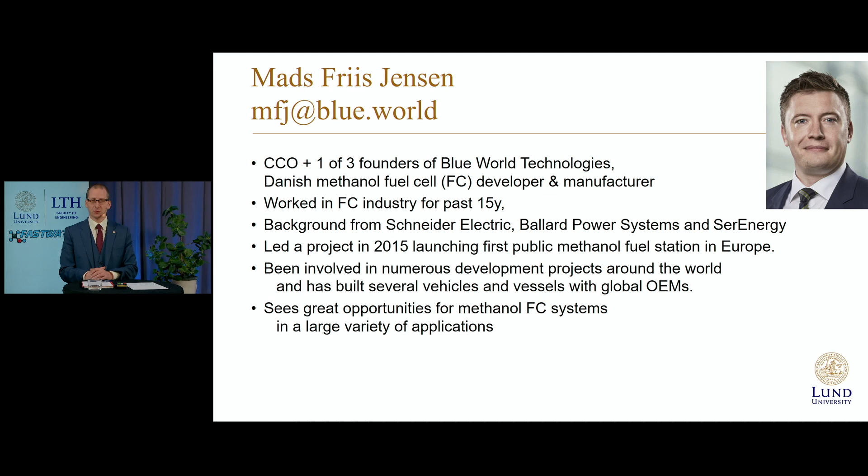Thank you. So thank you for the invitation to give a quick talk here about methanol fuel cells, the status, where we are, and how we see the development in the future.

Methanol fuel cells can be done in many different ways. There are some different technologies, fuel cell types. The one I will be focusing on is the PEM type fuel cell and the high temperature PEM type fuel cell with an external methanol reformer. So this means methanol is reformed into hydrogen, and this hydrogen is then converted into electricity in the fuel cell.

When using a methanol reformer, there is a limitation as to how fast you can dynamically change the load points of the fuel cell. So mostly when dealing with reformed systems for fuel cells, you would also have a battery system to take care of the peaks in any different application. So that's an intricate part of having methanol fuel cells, is some kind of hybridization mode.

As a company, Blue World are focusing on many different areas, primarily automotive and mobility solutions, so land-based transport. Also some other areas where you can replace a typical combustion engine with a methanol fuel cell, and then the heavy-duty segment, where the maritime area is regarded as that. Main point is that we can reduce CO2, remove harmful emissions, and save some cost due to a higher electrical conversion efficiency in most engines.

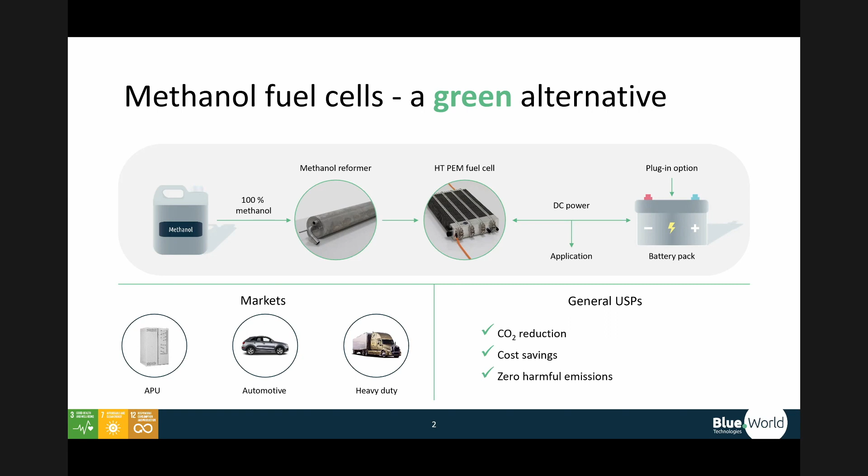So the high temperature PEM technology is a little bit different than other types of fuel cells, the traditional low temperature PEM. Now, the big advantage of high temperature PEM is its elevated operation temperature. It's operating at around 160 degrees. This means that the waste heat from the fuel cell has some potency, and it can be used to evaporate the incoming fuel. The incoming fuel will be a mixture of water and methanol, and this can then be evaporated by the waste heat, meaning you save some net energy in that total conversion in a system.

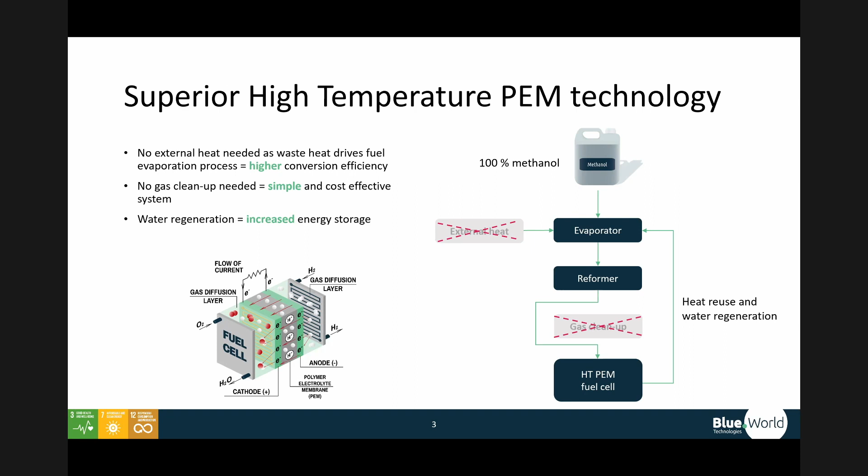Once the gas has been reformed in a generic or normal situation, if you want to use other fuel cells, you need to clean the gas. The carbon monoxide in the reformed gas is not acceptable to especially the low temperature PEM type fuel cell. With high temperature PEM, it is acceptable. So this means the simplicity in the system design is very high because there is no need for gas cleanup. So these things all put together means that the overall system is a very simple one, and you have a high net electrical efficiency because you can reuse waste heat streams and waste gas streams inside the fuel cell system.

The mixture of water and methanol, giving the right steam to carbon ratio to work in a reformer, is around 60%. The reason we illustrate 100% methanol going in here is because we can condense the water from the fuel cell exhaust, so we can basically generate our own water for this. So it's a water neutral system.

So as a company and as a manufacturer, our key focus is the fuel cell stack and the components inside that. We also do design the reformer, but it can be manufactured many places. It's relatively simple manufacturing methods. And this constitutes a product platform, which can then be used in multiple applications with some variance as to how you build the system, how big the system is, and how you operate it, etc.

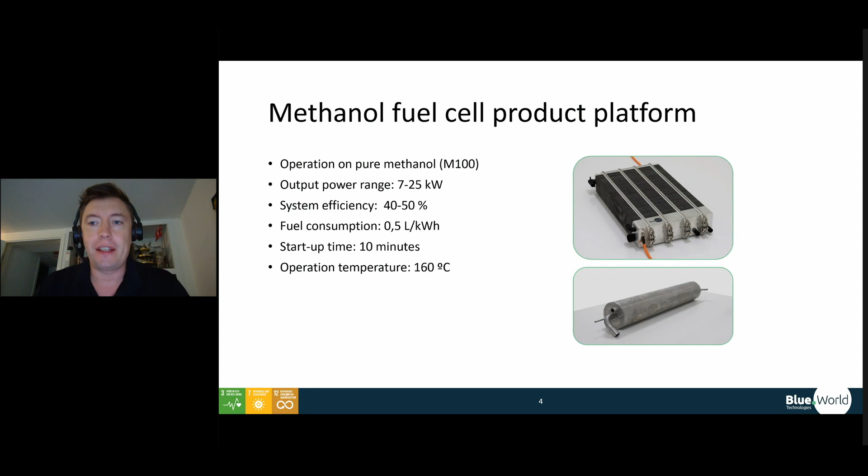One thing to note here is the startup time. So unlike a typical hydrogen fuel cell, which has a very short startup time, a high temperature PEM reformer-based system has a longer startup time. So this is something to take into account when doing an overall system design. So this is also why a battery hybridization makes sense, because the battery will not only take the peak loads, but also the starting load. This is specifically interesting for vehicles, but to some degree also for the maritime applications.

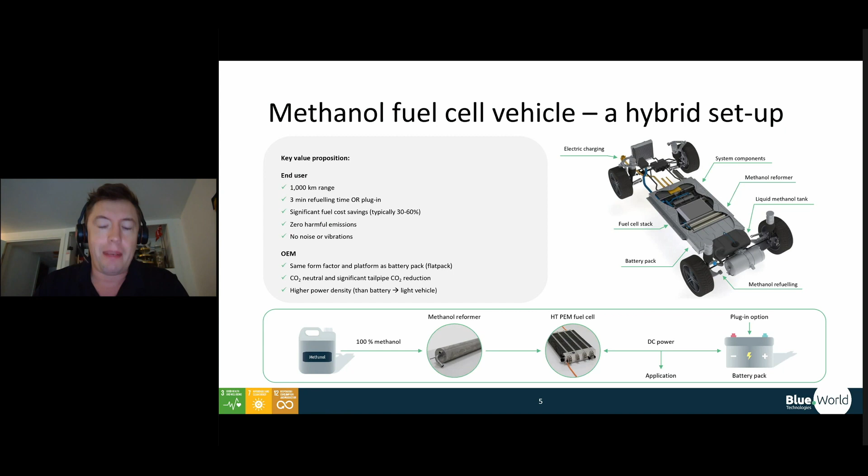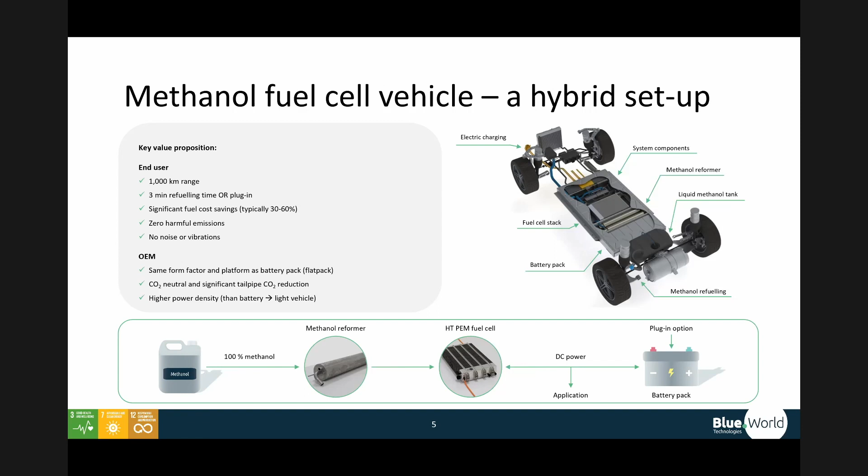In terms of emissions from the fuel cell, as I said before, the CO2 emissions coming out of the fuel cell will be the same as going in. So the chemically bound carbon in the methanol will be released again. That's not really easy to change.

What is, on the other hand, different from traditional combustion engines is there are no particle emissions, no NOx, no SOx. It is a completely clean emission. So this means that we will not just live up to regular emission standards. We live up to what WHO has of guidelines for workable breathing air. So this is, you could say, the big advantage of going fuel cells.

So when we are looking into this, we have built up a product concept around our core components, the stack and the reformers and related components. And basically, this is sort of a modular approach. This is pretty regular when it comes to fuel cells in general, but pretty special when it comes to methanol fuel cells. So it's a modular design like you would see on batteries, because it's a cell-based technology. It can go up to 5 megawatts and beyond.

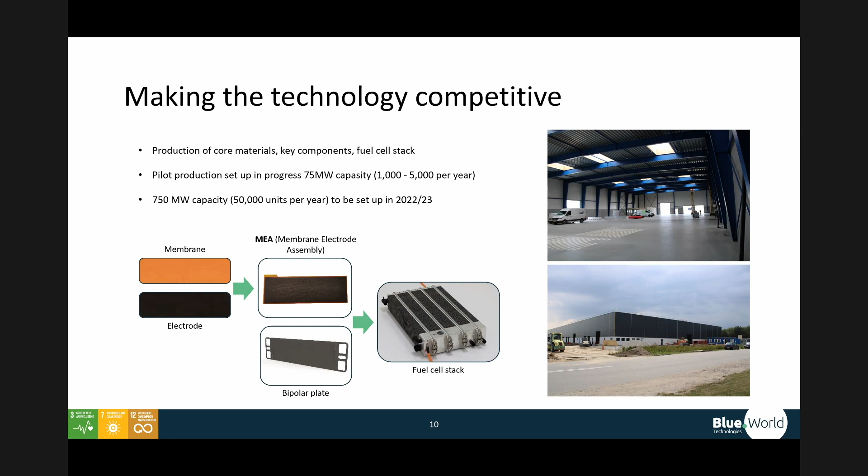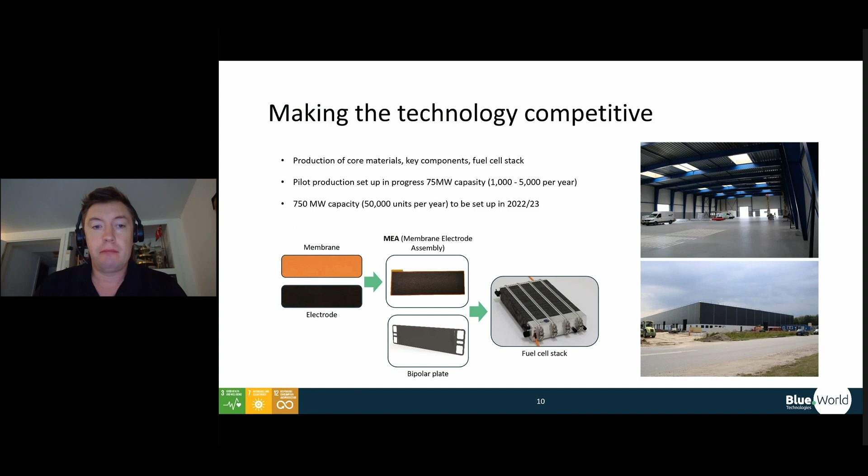So in Denmark, in Aalborg, we are setting up a pilot production which can give a decent capacity and get us to a good starting point. And we're planning a large-scale manufacturing unit which will be able to provide this in very large volumes. And that is the key to making it competitive. And that's my bits regarding this.

Great, thank you very much, Mads. So we do have a couple of questions for you. Maybe I'll start with the gas cleanup that you mentioned. That was a bit unclear to a number of the viewers. So could you elaborate on what the gas cleanup actually means?

Well, that means basically making sure that you do not get carbon monoxide, or CO, into the low temperature PEM. So it's an element that we don't use. The reason I mention it is because this is normally used in methanol reformer systems using low temperature PEM, which is something we don't need.

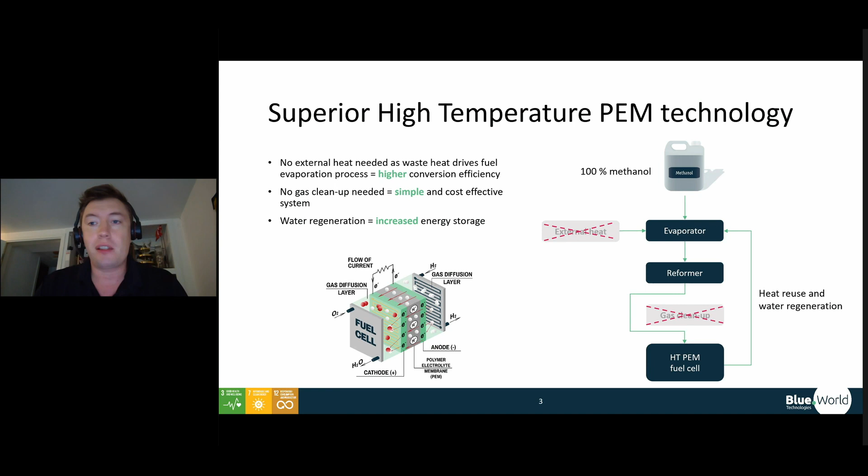So there are different ways. There's a palladium membrane, there's PSA, there are different technologies to do that. So it's not impossible, but it is just a piece of equipment you need, something that has durability aspects to it as well. So a piece of equipment that you actually don't need. Do not need. Yeah, exactly.

Great. Then we have a question on the required fuel purity. Are there requirements for the methanol in terms of purity before it can be used in the fuel cell setup?

Yes, we need the IMPCA standard. So the chemical grade standard, yeah. Exactly. So that is what we need. There are a number of fuel processing setups we can implement before the fuel cell system, which would enable us to do worse qualities. We don't mind water in the methanol. The challenge comes a little bit when you don't know how much, etc. But it is also possible to basically take raw methanol on board. So that's also possible.

Okay. Then we have a question concerning material availability. So if you're talking about PEM technology, there's a bit of a competition also between the fuel cells and the electrolyzers, both using PEM technology. So do you see issues with material availability? So we use platinum, and there is a good availability of platinum. Plus, we can, you could say, recondition the fuel cells when spent. So we get all that platinum back. So it's a fixed resource.

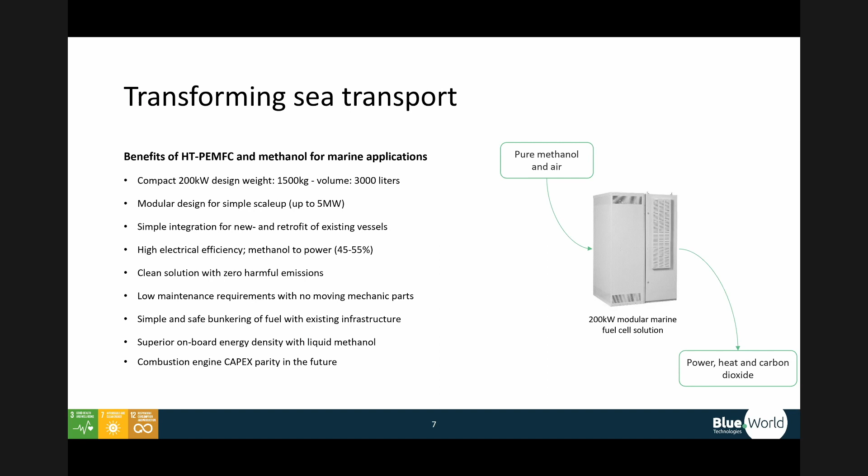Thanks. Then we have a question on bus application. So city buses, intercity buses. Would it be interesting to compare the methanol fuel cell solution there with a hydrogen fuel cell and batteries from the perspective of cost of ownership? Do you have any view on how those would compare?

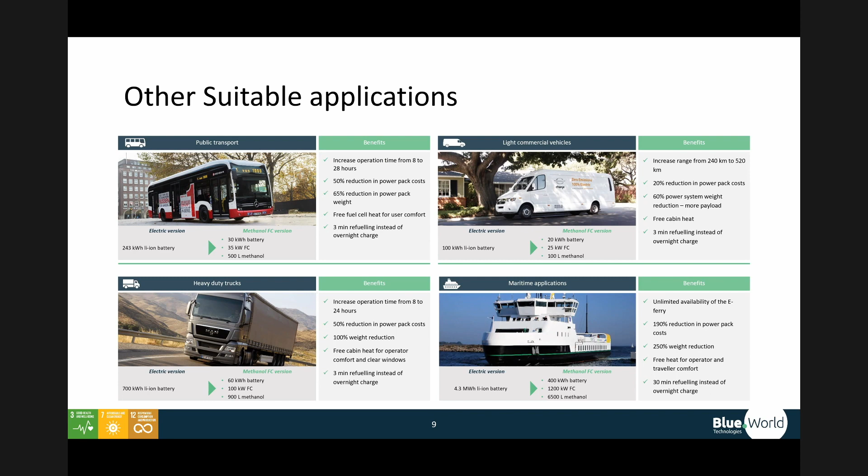Yes, it compares very, very well. So it is a very competitive technology due to the relative low price of the fuel and the infrastructure. And if you do the design of the bus in the right way, making sure that you combine the battery forces with the fuel cell forces, you have a very, very competitive bus topology there.

Then we have a very basic question on the product you actually produce when you convert methanol to electricity. What's the main reaction product? So a question about CO2 neutrality. What happens to the carbon atoms? Well, they go out. So if it is fossil carbon atoms, they will come out again. So of course, if this needs to be sustainable, the carbon sources also need to be sustainable.

So that comes back to the whole question: will we have enough carbon? Now that's a big discussion. I don't think today is where I should take that, but I would say based on what we see, even without direct air capture, we have plenty of carbon sources available.

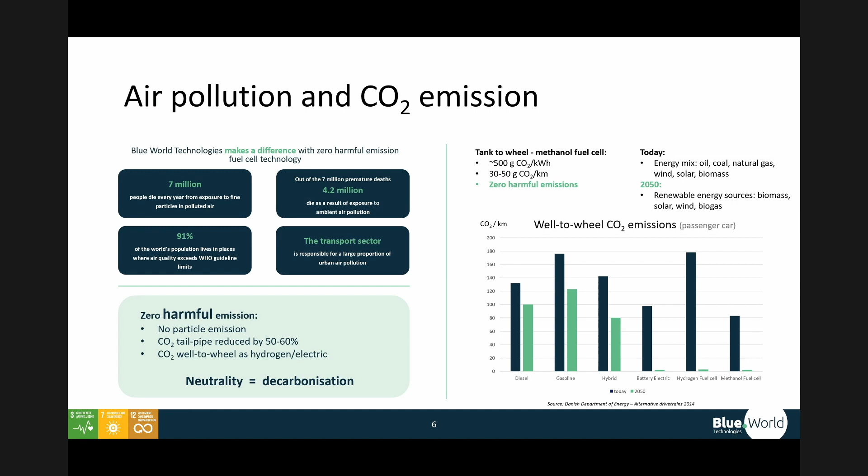And then just to check up on that, it does convert fully to CO2? You don't have a CO stream in the exhaust? No, as I said, we do accept the CO from the reformer to the fuel cell, but after the fuel cell, in the so-called anode waste gas, we convert the CO that can go through the fuel cell into CO2. So there is no CO coming out of the exhaust.

Then we have a more critical question zooming in on the efficiency you mentioned. You mentioned 45 to 55% efficiency, but then again, two-stroke engines for shipping get the same type of efficiency. So a question on how you position the fuel cell system versus the combustion engine running on methanol.

Yeah, so what I tried to show with this slide is that the main engine, a two-stroke engine, is not something we compete against, basically. We are more against the four-stroke APUs. And you could say if you do this really well, it is also on par efficiency-wise. So if you have no value from the added benefit of the product we supply, then don't buy it. Basically.

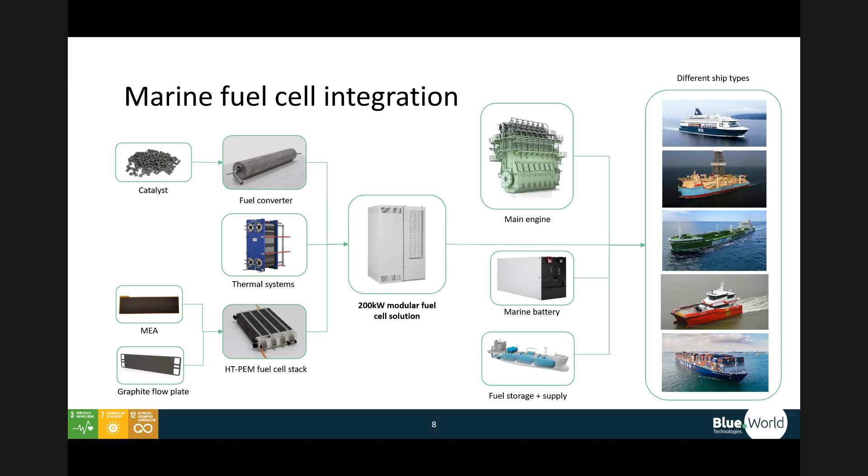Then maybe a final one, but also an important one, I think. A question on the durability. Do you have an insight into the lifetime of the fuel cells? Yes. So the technology platform that we have, we know is good for beyond 20,000 hours. Now, doing that in a product on a ship is not something you prove overnight. We don't have the luxury of producing this for many, many years.

So it is not so much about technical capability as it is about developing the product and proving it at sea. So we foresee that this is very possible because we know the technology can do it, but it will take some time to give out warranties of the same. So stay tuned for that one.